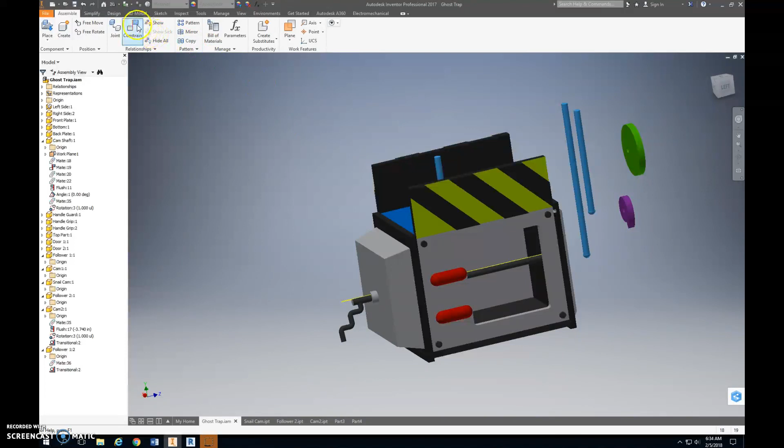So first thing that you need to do is place your cams inside of your assembly, like I have mine placed here. It doesn't really matter where they're at, as well as the different size followers. And make sure that you have all of them loaded in. I'm going to go ahead and constrain the cams first, and then I will do the followers second.

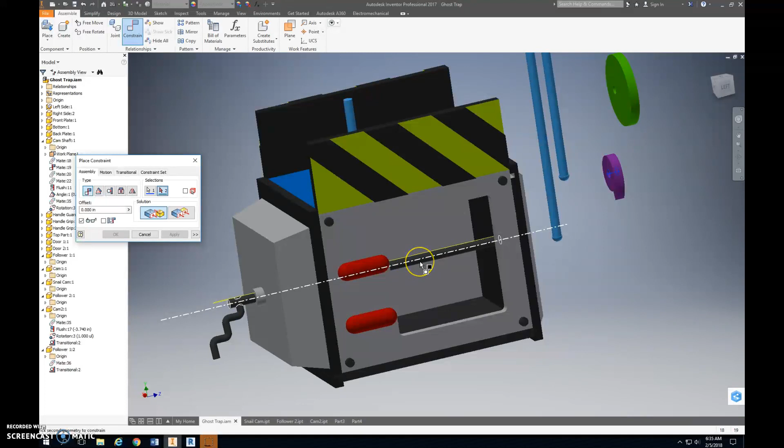The first thing that we want to do is place the cams constraints right here on this center line that goes through the actual cam. That is what we're selecting. And then we're going to select the center dotted line that's going through the camshaft itself. When you hit the apply button, you can go ahead and cancel, make sure that it's on there and it actually slides, moves around, spins, make sure it's done correctly.

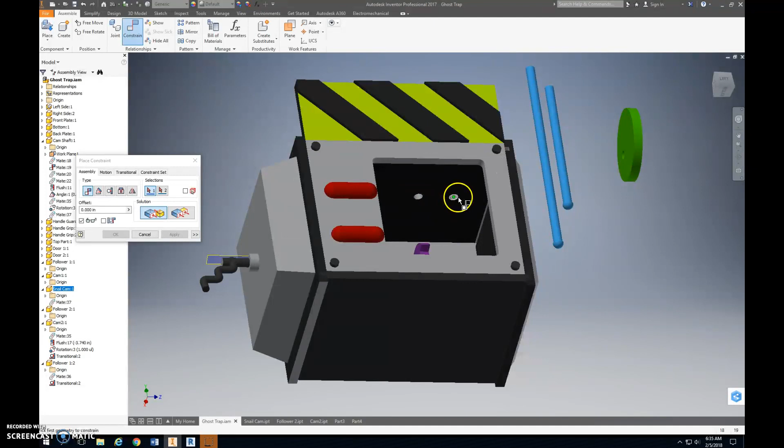And then we can constrain and use the flush tool to get this to be lined up with our holes through the top, our guides. Now, you should have precise measurements for yours. For this one, I'm just going to eyeball because I don't have the exact measurements. But you should have them based on how far away your circle is from the center point and how far the center of the cam is from the edge of the wall.

But I'm going to go ahead and flush this side with this wall, and you could use the other wall if you wanted, or the other side of the cam. It doesn't really matter. But I'm going to use this one, and it's going to go into the wall. It's not exactly where we want it. We want it to move out, so we're going to use the offset.

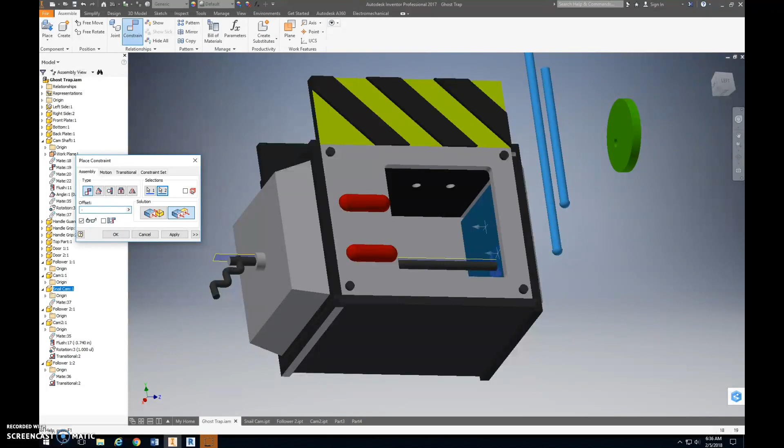Now, you can either use positive or negative in certain situations. If I chose the other wall, the positive would work. But since I chose this wall, it's going to be negative. So if I did put a positive in, it would go out here. So I'm going to adjust, and I'm going to put it as a negative. And not exact, I think it's around 2.2, maybe 2.1. 2.1 is close enough for this one.

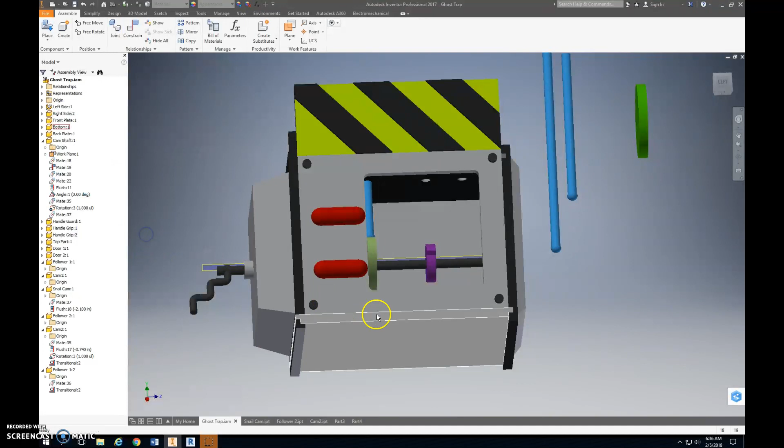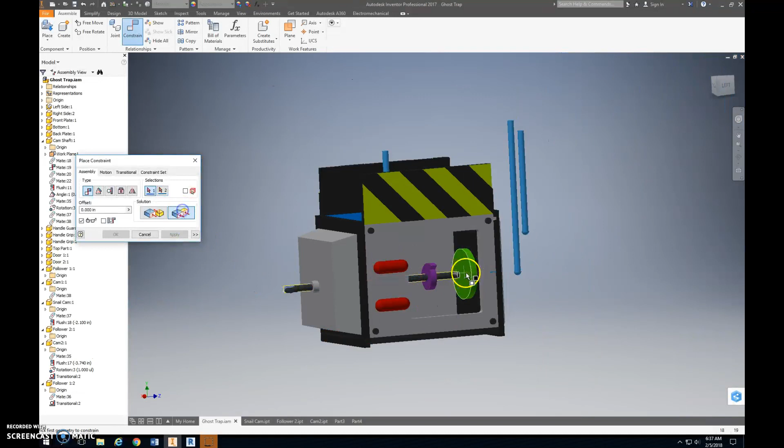I'm going to hit apply, and then I'm going to cancel this out. So I have this on there in the correct spot. If I spin my handle, it doesn't spin yet, not quite done with it. I'm going to do the same thing with this one. Go ahead and constrain, get the center point there, center point here, and flush this one from the inside wall as well. This one's a little bit closer.

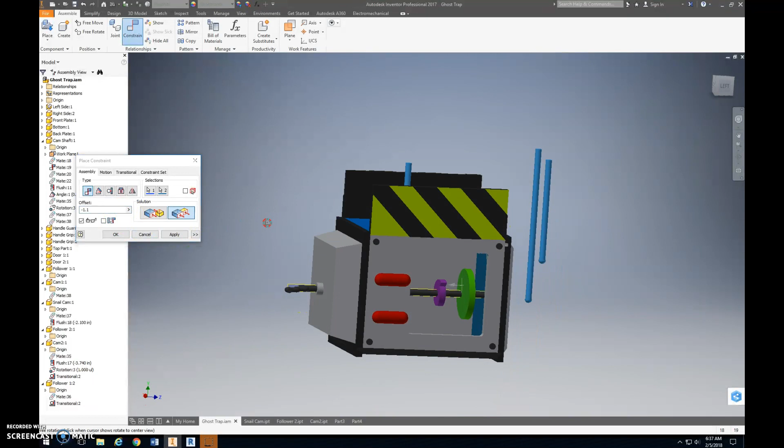Let's try -1. Looks like -1.1 maybe. So we will again flush this one to this wall. -1.1, did 1.2, a little bit off. Let's try the 1. So -1.1 will actually set the flush for this one to about where I want it. I'm going to hit apply, cancel, and again this one will spin too, but it won't spin with this.

We're now going to make an adjustment so that they spin with the handle when we turn it. So go to constraint, and we're going to use the motion constraint next. We don't have to adjust any of the settings, just leave it on rotation, leave it on forward, don't change the ratio. This could be adjusted to make it go faster or slower, but for the purposes of this, we're just going to keep it the same.

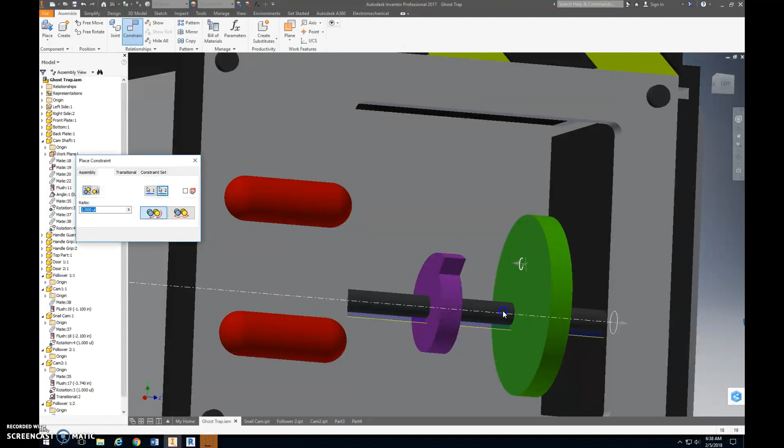So select the face, and then the actual camshaft, hit apply, and then do the same thing for the other one. Hit apply, cancel it out, and now when you spin the handle, they should spin with it.

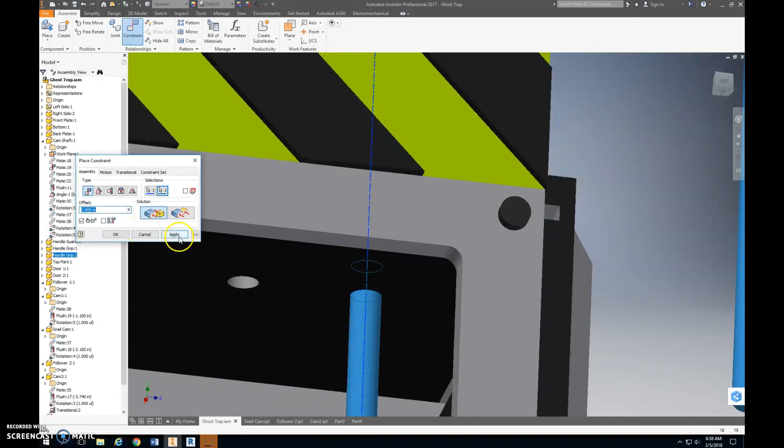Next thing that we're going to do is place the followers into their appropriate spots. Hit apply, and then I'm going to cancel so I can move this up a little bit. I used the really long one on this portion. I probably shouldn't have, but just in the future, make sure that you use the correct ones.

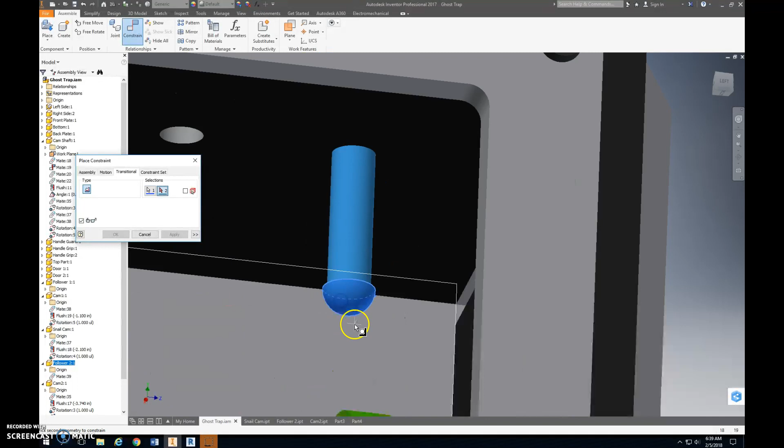I'm going to go ahead and now use the transitional constraint. We're going to click right here on this edge, and we're going to click on the edge of the cam we want to connect to. Hit apply, cancel this out, and then you can spin, and they'll follow along. Same thing can be done with the snail cam. However, if this spins the wrong way, it will lock into place.

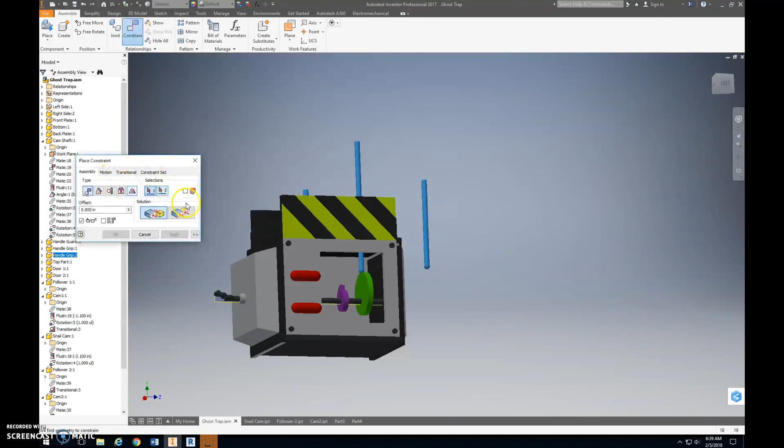So we'll do it really quick. I'll place this one here. And then I will do the same thing, transitional, like this. If you use the snail cam and you're not spinning the correct direction like I am right now, and let's say you go this way, it will go inside of the cam, connect to the camshaft, and then it will no longer disconnect.

If that happens for some reason, just click on the actual follower itself, undo the transitional constraint, move it back up, reconnect it. It's really simple.